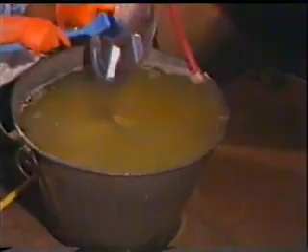Sewage is the most general term used to define all kinds of liquid waste resulting from a community. From the public health point of view, it is important that all kinds of liquid waste resulting from a community, as and when collected, should be promptly disposed of after treatment.

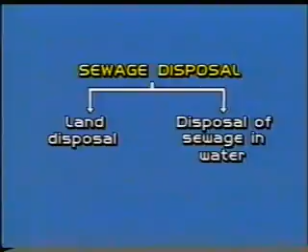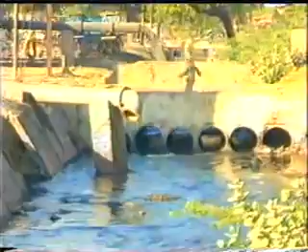Sewage can be disposed of either on land or in a large water body. One of the practices commonly adopted is that the sewage is discharged on an open land or in a pond nearby. This way of sewage disposal will create unhygienic and insanitary conditions for the community. This will result in breeding of mosquitoes, flies, and all kinds of bacteria that may cause outbreak of diseases.

It will not only spoil the aesthetic appearance of the city, but also pollute the nearby water table, and thus can lead to spread of epidemics. In general, it can be said that sewage disposal in this way is a threat to public health and especially to the people living nearby.

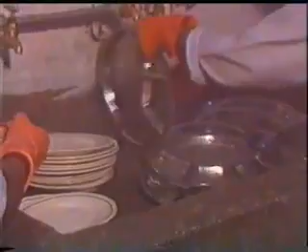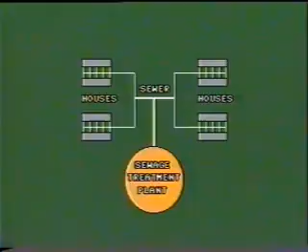But if sewage is discharged directly into the river without treatment, it will pollute the water and endanger aquatic life. This water as such would be unsuitable for human consumption. These considerations point the way to the systematic collection through underground system of drainage and its treatment before disposal. Sewage treatment means the process to which sewage is subjected to remove its objectionable constituents.

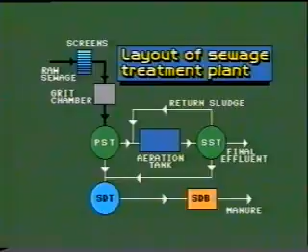Take a look at a sewage treatment plant where domestic sewage is being treated. Let us understand the layout of a sewage treatment plant through a line diagram. First of all, raw sewage passes through the bar screens. Thereafter, it enters the grit chamber where inorganic matter is removed. After this, sewage enters the primary settling tank, where heavier suspended organic matter settles down. The settled material, which is known as sludge, goes to sludge digestion tank.

The effluent from primary settling tank enters the aeration tank for secondary treatment. After aeration, sewage enters the secondary settling tank for final sedimentation. A part of settled sludge goes to aeration tank. The remaining extra sludge goes to the sludge digestion tank. Finally, the effluent is disposed of or used suitably. On the other hand, sludge which has gone to the sludge digestion tank undergoes digestion, and digested sludge is sent to sludge drying beds, which is finally used as a manure.

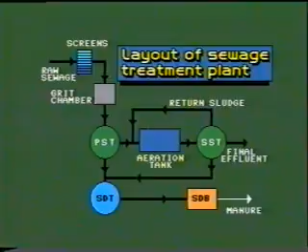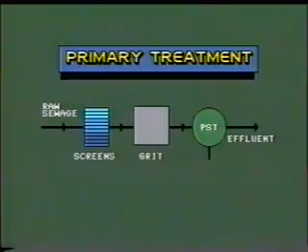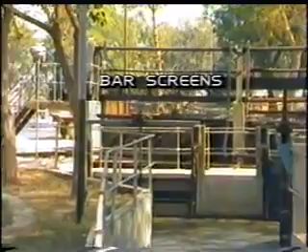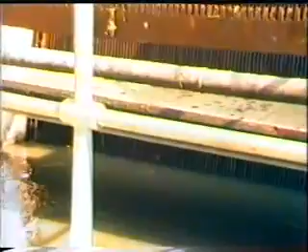Sewage treatment is carried out in two stages: primary treatment and secondary treatment. In primary treatment, sewage passes through bar screens, grit chamber, and primary settling tank. Sewage first passes through the bar screens where floating and suspended matter such as wood, paper, rags, etc. are removed. The waste material which is retained on bar screens may be lifted and removed mechanically with the help of conveyor belt arrangement.

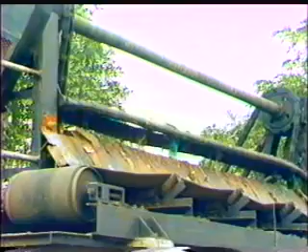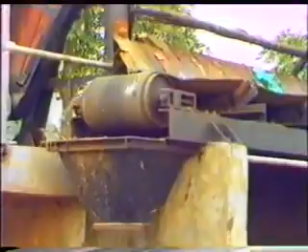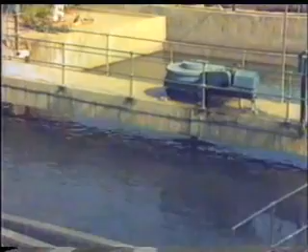After this, sewage enters into the grit chamber. It is an enlarged channel in which cross-section is increased to reduce the velocity of flow. This causes settlement of heavier particles while the lighter ones remain in suspension. These bars are provided near the inlet to the grit chamber to keep the velocity approximately constant. The central drive unit operates the scraping arms, causing the settling material to get deposited towards the sump.

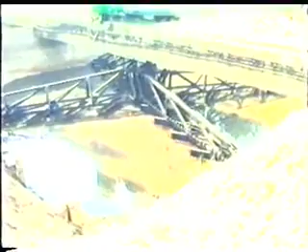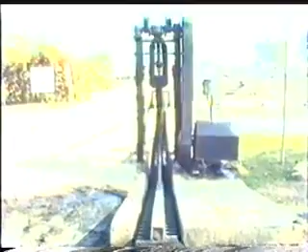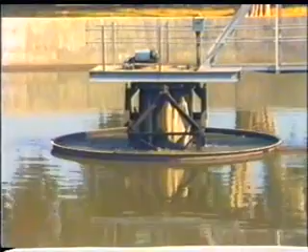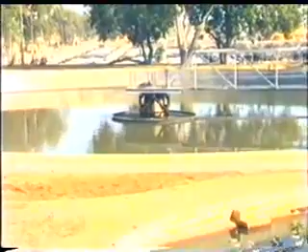A mechanical arrangement is commonly adopted for the removal of settled material from the grit chamber, which is finally disposed of by transportation. Suspended solids, which are too fine to be removed by screens and too heavy to be removed by flotation, are taken out of sewage by allowing it to quiescent through sedimentation in the primary settling tank. Screened sewage is fed from the bottom of these tanks by means of inlet pipe and is guided by circular baffles near the center.

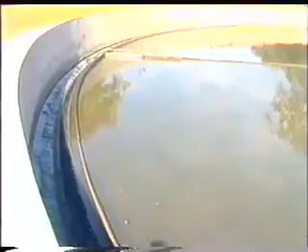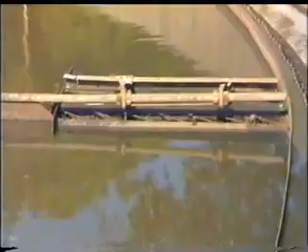A detention period of 1.5 to 2 hours is allowed at this stage. It then flows over the peripheral weir and enters the effluent channel. Scum is removed by means of a scum remover, which moves over the liquid surface and drops the scum into a sump. This scum then enters a scum collection tank from where it is finally disposed of.

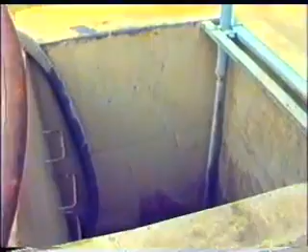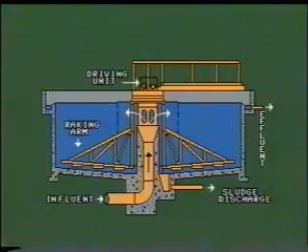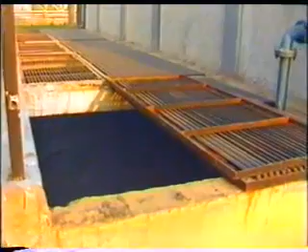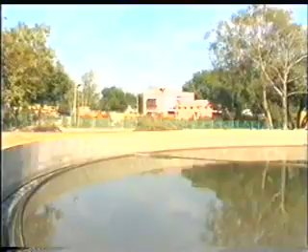The raking arms operated by the drive unit gently agitate the sediments with the flocs to form sludge. This is then removed through the sump and discharged into sludge collection tank. Sewage treatment at the primary stage must ensure removal of 60% suspended solids and 30 to 35% BOD. The clarified sewage, carrying mostly colloidal and dissolved solids, passes out as effluent for secondary treatment if necessary.

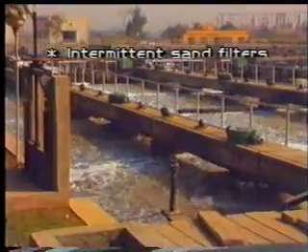The treatment of sewage with bacteria is known as secondary treatment. It is carried out to remove the non-settleable organic matter which is present in the primary effluent. The various methods of secondary treatment are intermittent sand filters, contact beds, low rate and high rate trickling filters, and activated sludge treatment process, which is explained here in detail.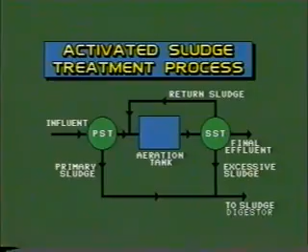During the activated sludge treatment process, the effluent from primary settling tank is passed through aeration tank for further treatment and to prevent septic conditions. This aerated sewage is passed into secondary settling tank for removal of activated sludge. Part of this sludge is recycled into the aeration tank, whereas the remaining sludge goes to the sludge digestion tank. Finally, the effluent is disposed of or used suitably. Now, a closer look at the aeration tank.

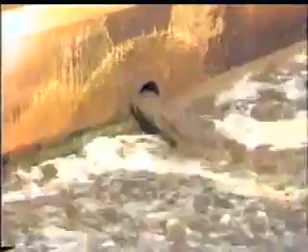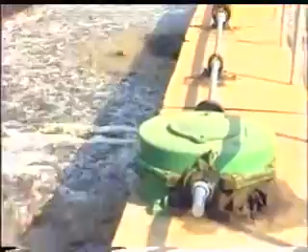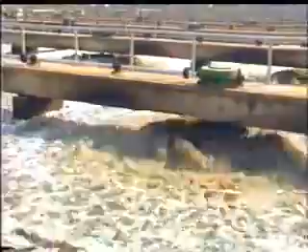In here, mixture of effluent from primary settling tank which contains non-settleable organic matter and activated sludge recycled from secondary settling tank is passed on into the aeration tank. Here, these are subjected to aeration and agitation by high-speed impeller action for about 6 to 8 hours. The primary purpose of aeration is to supply oxygen to sewage for maintaining aerobic conditions.

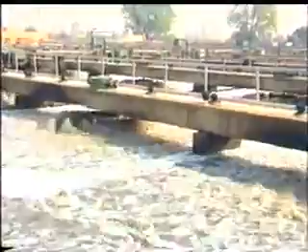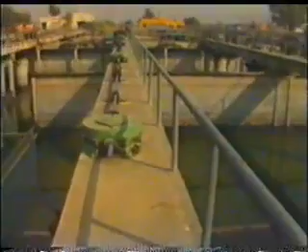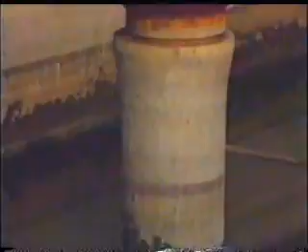Some of the main internal features of the aeration tank that can be seen here are baffle wall, central uptake cone, and impeller blades. Baffle wall increases the path of sewage flow. The blades of two adjacent tanks rotate in opposite directions. This ensures more effective aeration and agitation.

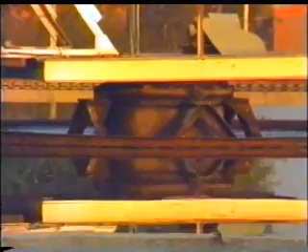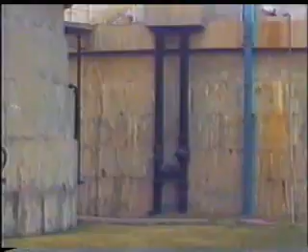Aerated sewage goes on to a secondary settling tank for final settlement of secondary sludge. The secondary settling tanks are similar to primary settling tanks but have a detention period of 2.5 to 4 hours. Part of settled sludge goes to the sludge collection tank, which also collects the sludge from primary settling tank. Sludge is passed on to the sludge digestion tank for anaerobic decomposition of organic matter. This process is known as sludge digestion.

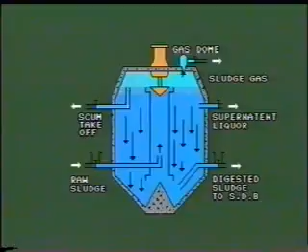Raw sludge is pumped into the center of tank for a detention period of about 4 weeks. Gases are released through a dome at the top. At the same time, supernatant liquor and scum are removed from the sludge digestion tank. Digested sludge settles down and passes on to sludge drying beds. Dried sludge, which is rich in nitrogen, is used as a manure. Resultant effluent from secondary settling tank is free from suspended solids and BOD to the order of 90 to 95%. Finally, this relatively harmless wastewater can now be used for irrigation and other purposes.